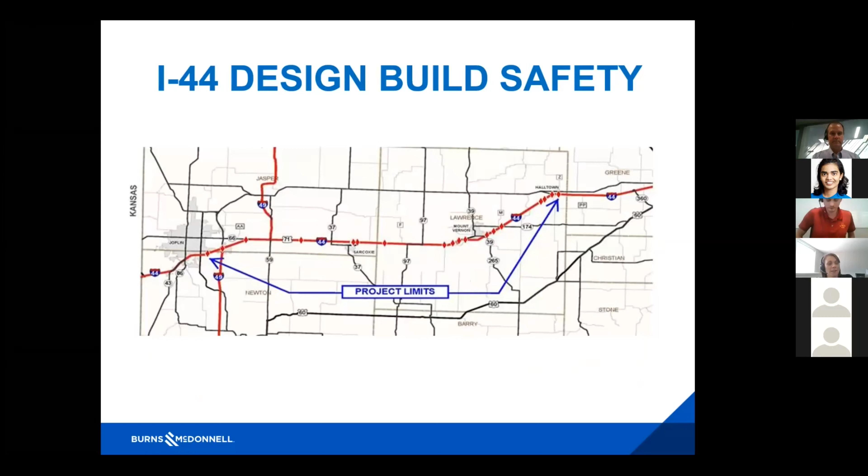So this quick recap basically has us help them prepare and identify selection criteria for the overall project. The original project was slated to be a rehab of 12 bridges spanning over 52 miles.

So partway through getting all the documents ready for this project, MoDOT asked us to go through and evaluate the data and figure out what they could add into this project to enhance the safety along the corridor.

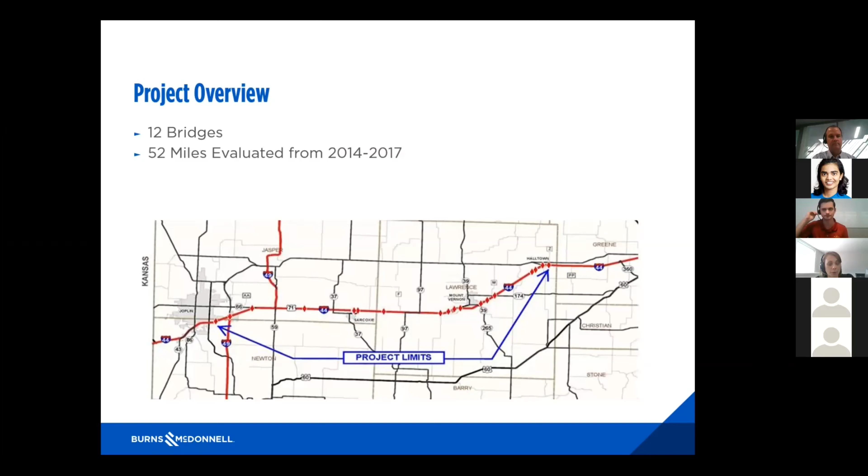We did this using a couple tools. ISATe, the interchange safety analysis tool that is widely available, and is pretty fun to use if you like data. It's data intensive, and so that was used at spot locations.

And then we used MoDOT's crash database, which houses all of the crashes within the state of Missouri. This allowed us to do some large overarching analysis.

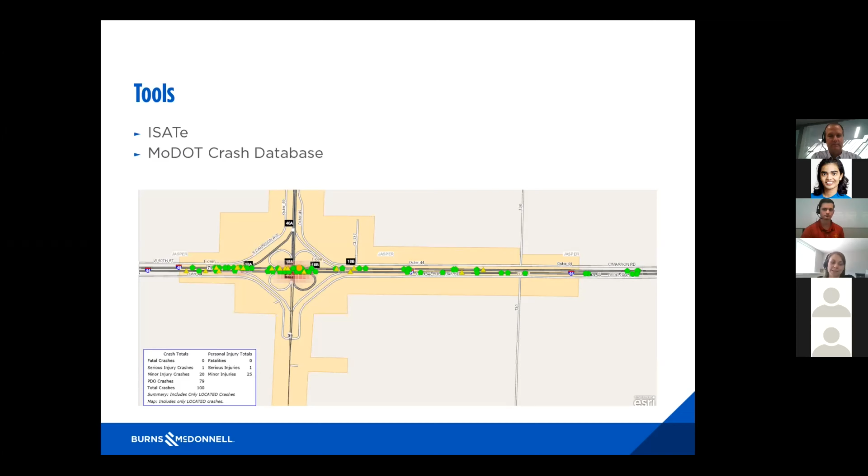Before I begin, for anyone who's not familiar with crash terminology, KABCO is the severity rating scale for crashes. K is fatals, A is severe injuries, B is minor injury, C is potential injury, and O is property damage only. We look at different combinations of these when we're doing analysis.

For the first pass of analysis, we just analyzed eastbound and westbound I-44. We looked at all severities, and we were just looking at a very basic number of crashes per mile.

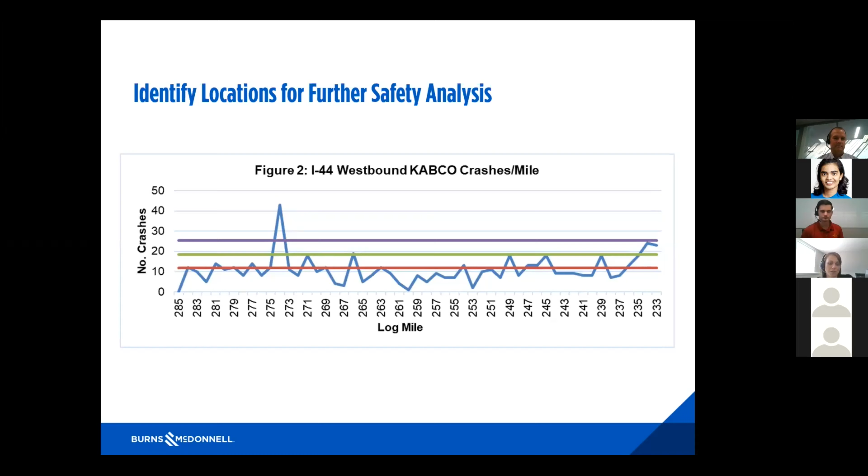So this was the same analysis, but we took out the PDO crashes to see if there was any areas where we were seeing a large number of injury and above crashes.

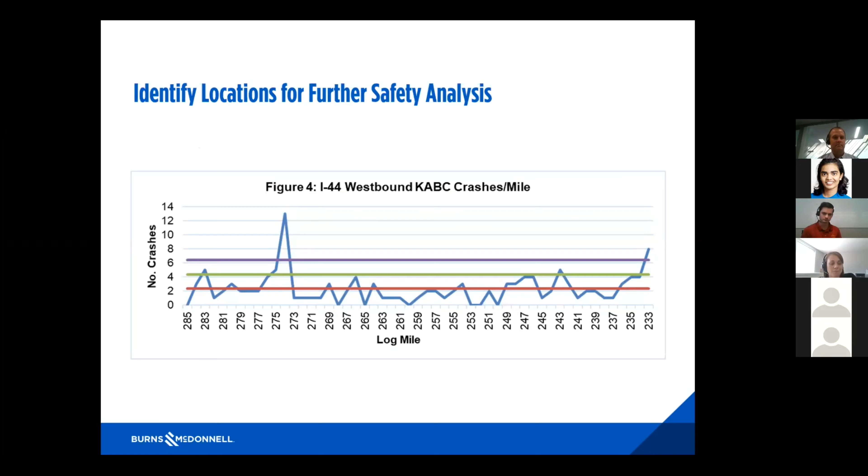Oh my God. Let's see. Okay. Sorry, I'm having controls issues.

So the third pass of our analysis included looking at all severity crash rate per mile, the crash rates, and then the crash rates for just the injury and above.

For this corridor, we were finding that we were seeing about 10.5 per 100 million vehicle miles traveled. We compared this to the statewide average, which is 23.4. So we weren't seeing as high of crash rates on this facility as other areas in the state.

So for the corridor average, backing up, so we had the 10.5 per 100 million.

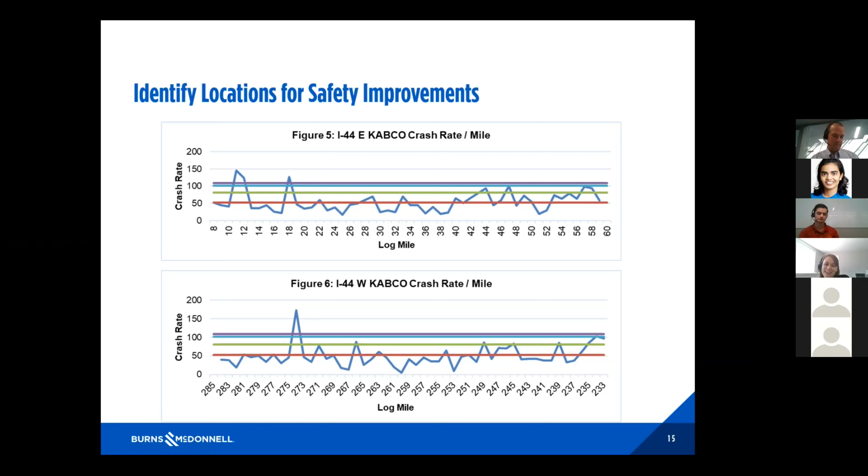We did have 3 miles within the project that were 2 or more standard deviations greater than that average, and so that was kind of an important point to look at.

We identified key points within the corridor that had a statistically significant number of crashes that we wanted to look at in more depth. So you can see those locations.

The first was the I-44, I-49 interchange. This location was found to have a crash rate above the corridor average, and most of these crashes occurred in the loop ramp weave areas, as well as the acceleration and deceleration lanes. Because mitigation measures would not be practical at this location due to the project scope, the location was not recommended to be included for the design build teams to look at.

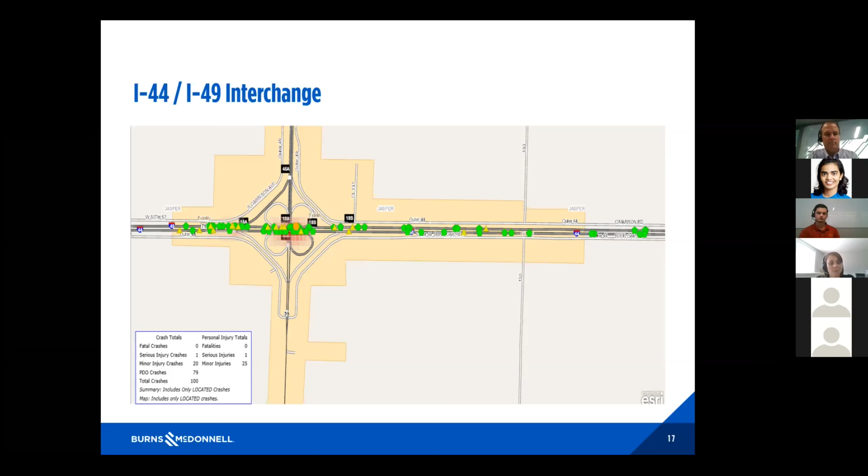Then we have the interchange near Prigmore. This interchange was actually recently built when we were looking at the data, so we did not have enough after data to evaluate whether this would be a good location to identify what we should be looking at from a safety perspective, and so it was also not included as something the design builders should look to include.

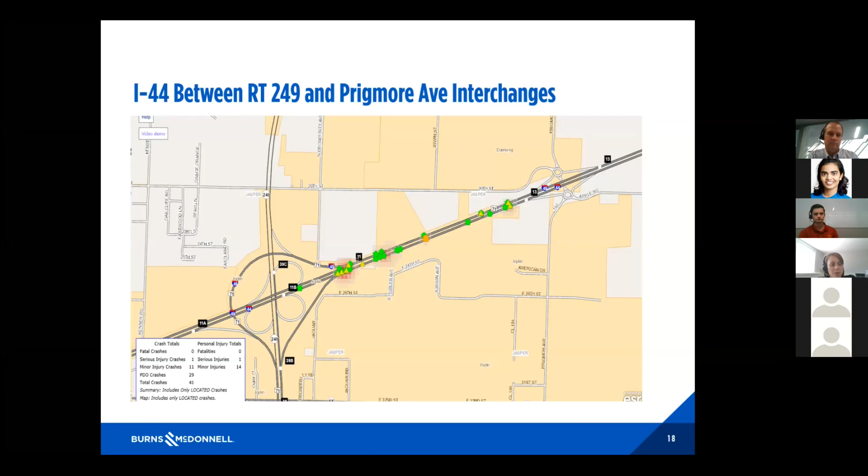The Route O, Z, and 96 interchange was actually identified at the very beginning of the project as an area of interest.

There are a total of 69 crashes within this segment, and 38 of those were identified as out-of-control crashes. MoDOT had the idea that this would be a good area to focus on to see if there were any improvements we could make with this project.

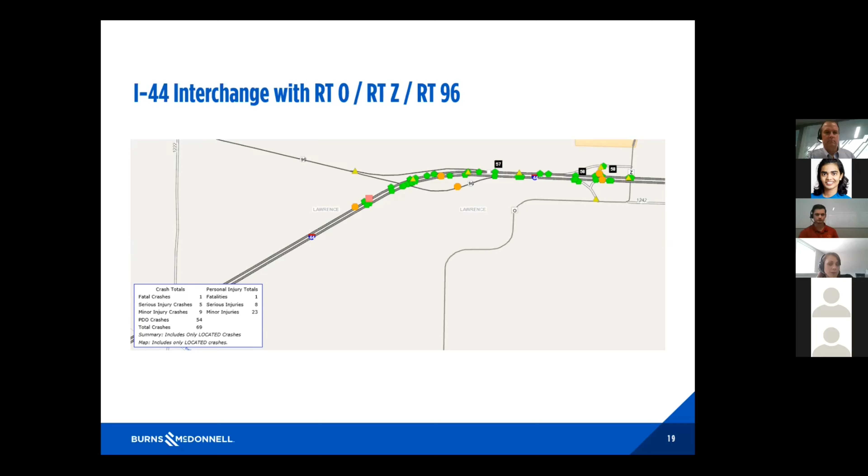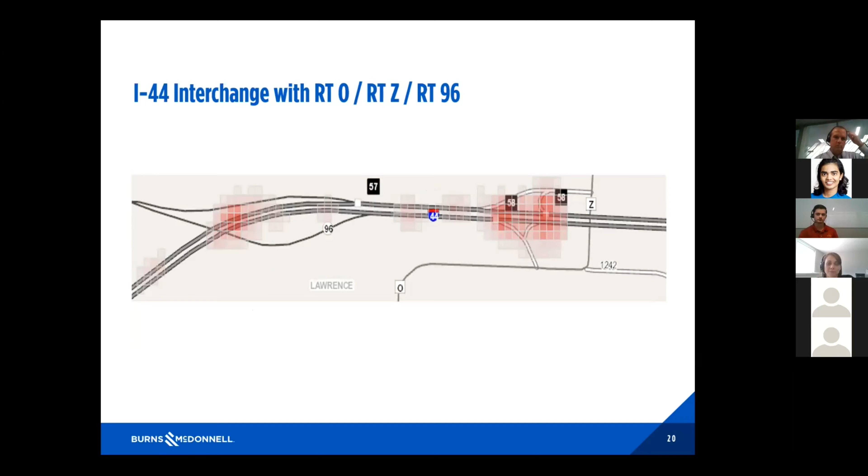This shows how their database works. It'll put densities for the crashes. You can see this is looking at just the out-of-control crashes we saw and where those were occurring: entrance and exit of curves, and at the different ramp terminals.

These tables show the predicted crashes versus what we were seeing with the existing crashes. From these tables, we can see there's a higher than predicted number of crashes occurring along I-44. The key areas were near the horizontal curves and the eastbound on-ramps, which you saw before with the heat map.

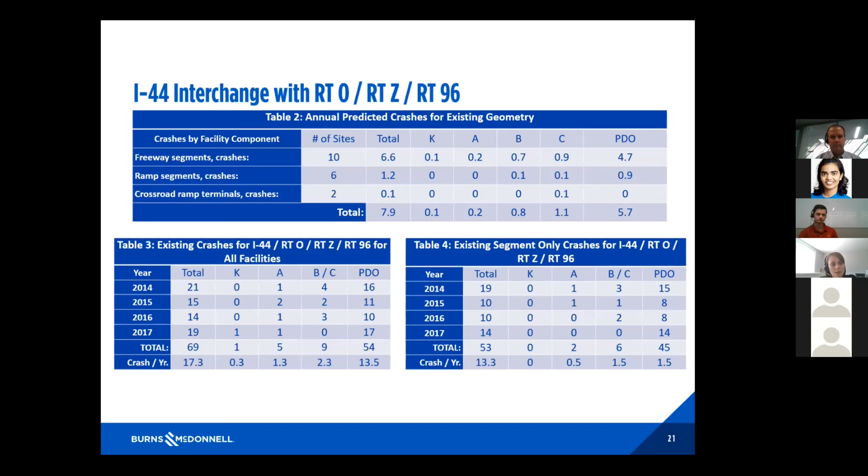In addition to this base condition where we looked at what was out there today, we evaluated an alternative where we eliminated two weave areas and changed the grade separation of I-44 and Missouri 96, which allowed us to reconfigure the ramp locations. The results are shown here — this basically results in a reduction of 9 crashes in 10 years.

That doesn't seem like much to you and me, but when you're looking at saving lives, reducing the number of crashes, any reduction is very important to look at. So 9 crashes in 10 years, not even a crash per year, really doesn't seem like much, but it will add up over time.

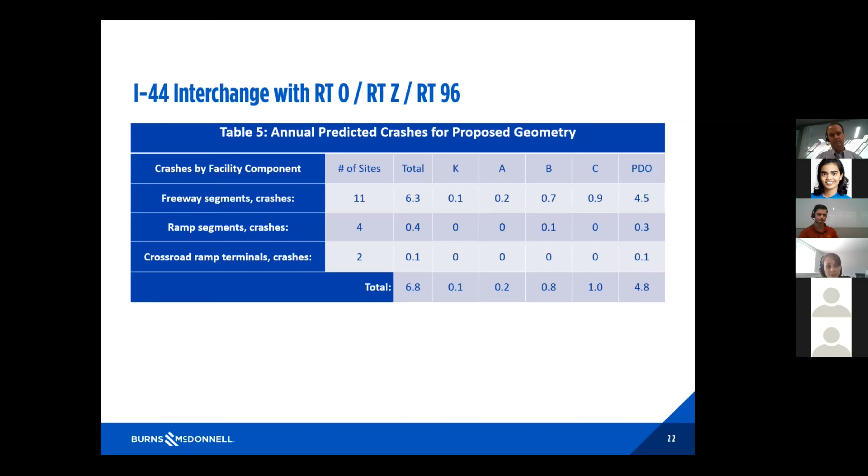So we have these quantitative benefits, and we also believe that the elimination of the westbound off-ramp, which was a loop ramp with an advisory speed of 20 miles per hour, would help eliminate the speed differential and reduce the number of rear ends — an effect not fully reflected in this analysis.

The fourth area of interest we were looking into was at Mount Vernon. This area was also included for further analysis, as well as an area of interest for the design builders to incorporate. The primary crashes here were due to speed differential. There's a very high number of heavy trucks in this area, and many of the crashes involved those heavy trucks and the short acceleration and deceleration lanes.

When we ran the models, we were seeing about a reduction of 1 crash every 10 years. But when we looked at it from a different perspective, using CMFs, we saw that there would be about a 22% reduction in crashes in the area.

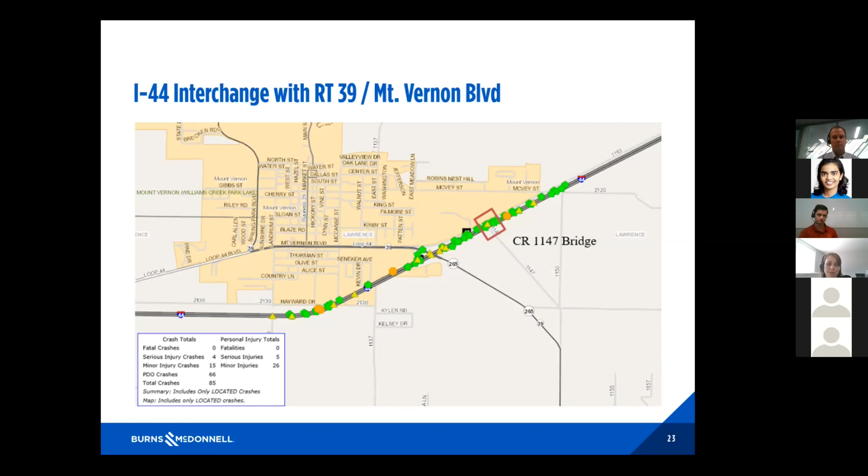At those locations, we looked at what the existing crashes were, and we saw that wherever there were smaller shoulders, there was an increase in traffic and in crashes.

So we were able to use that to say, hey, if we tell the design builders to add some widening, that should increase the safety at these areas.

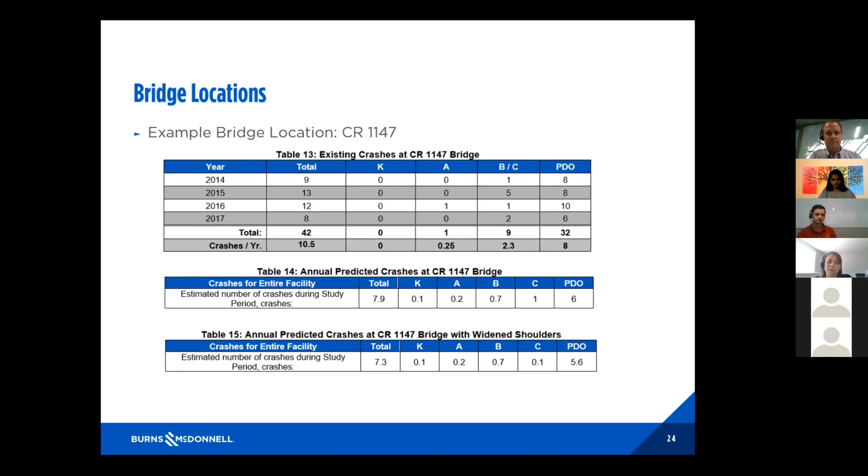So the inclusion in the bid — we ended up putting together these different rankings to be able to be included in the bid.

However, the only things included in the winning bid, and all the other subsequent bidders, were signing and pavement markings. These are fairly low-hanging fruit that the DOT tends to do themselves, but this allowed us some lessons learned — basically that we needed to award either more points or more money for those safety aspects to be included, as well as starting out the project knowing we want to include safety.

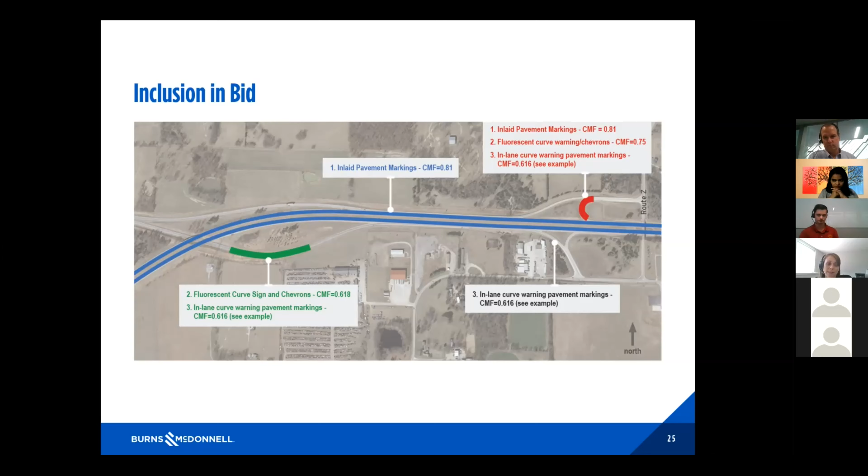So here, let me see if I can get my laser pointer up.

So for this presentation, we're going to be talking about one of the bigger projects that we have going on at Burns McDonnell. I'm sure many of you have heard about LaGuardia Airport in Queens, New York.

So with this, it is an $8 billion project. Our portion is $4 billion.

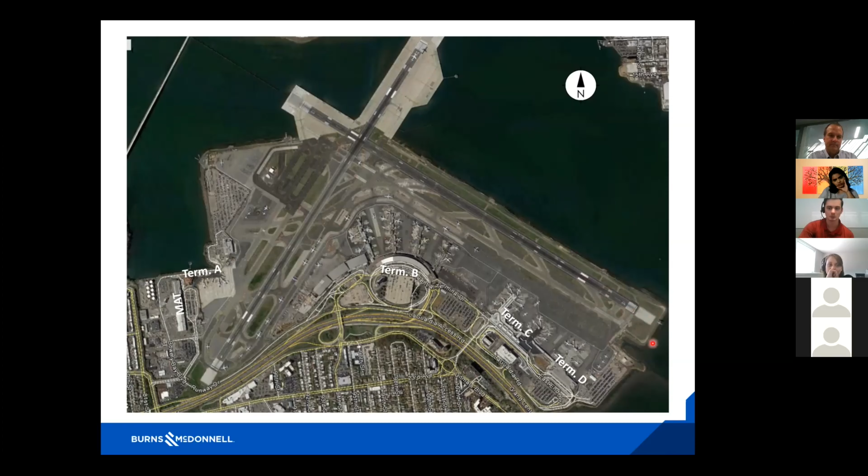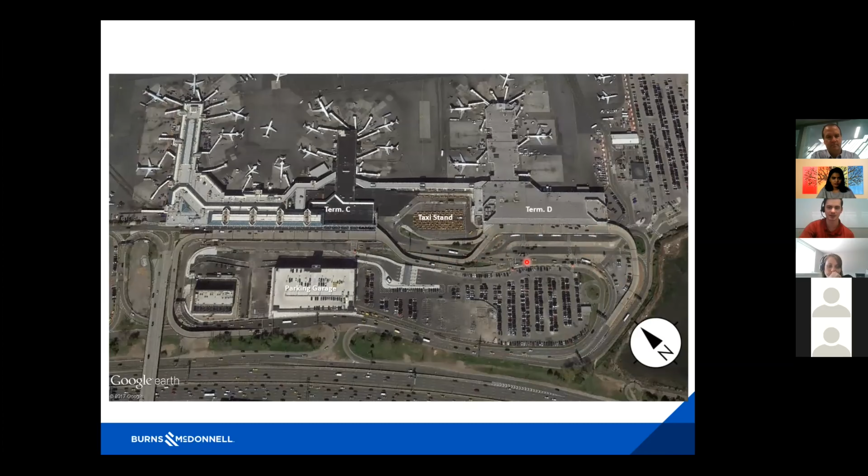Here's a blow-up just to give you an idea. There are two levels in the existing design, departures at the top and arrivals at the bottom. As you can see, you're going up and down quite often instead of just staying on the departures level like in the new design.

One thing I didn't mention is that Burns and McDonnell has a different practice that does the aviation side — from the curb, to the terminals, to the airplanes, to the actual fueling and runways — and they are working on that portion of the new design. Our transportation group is working from the curb out. So it's curb side, land side, and air side. What we are doing is more the roadways, the cars getting there, people getting to the airport, and then our aviation group takes care of things as soon as people enter the actual airport for the new design.

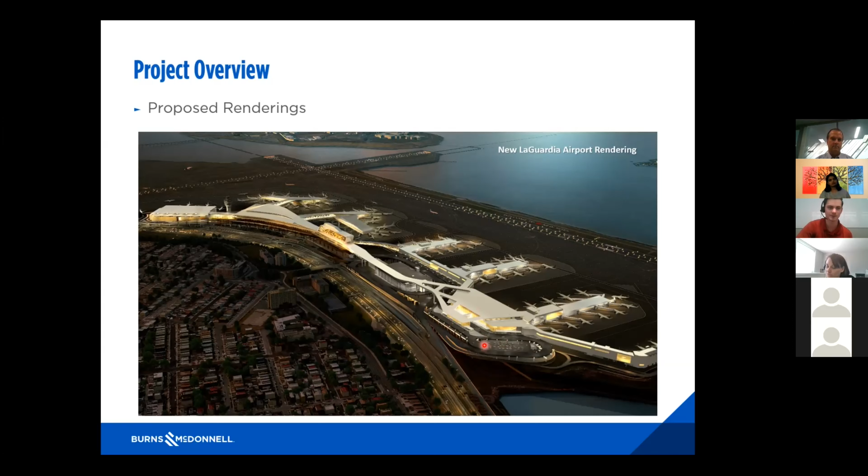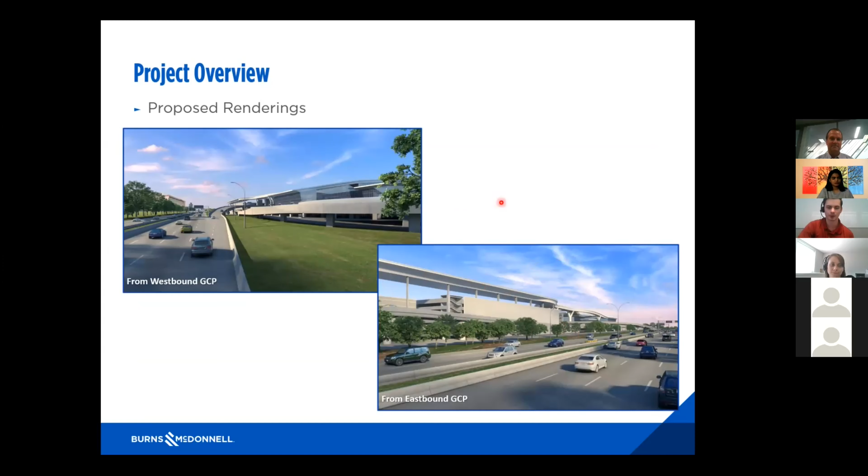Here are some new renderings for different roadways that our architecture group came up with to give Delta an idea of what to visualize, along with some interior views of what the new airport's gates are going to look like. As you can see, they're sparing no expense for this new airport.

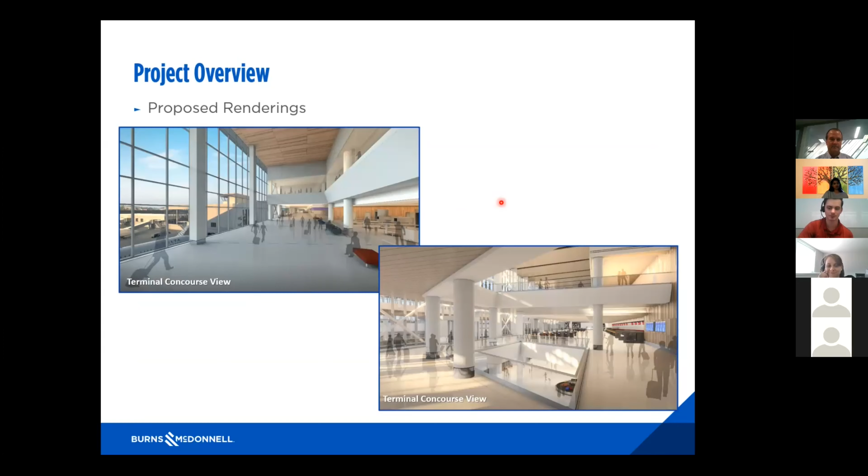When it comes to airport traffic and roadway design, there are four main things you need to utilize — two standards and two software packages predominantly. The ACRP Report 40 gives you the entire lowdown of airport design: the different roadways, different speeds needed, the different modes of transportation that utilize airports, and how to use occupancy factors to translate planes full of people into passengers and cars getting to and leaving the airport.

Then there's the classic Highway Capacity Manual, just for capacity of roadways. The main software we use is PTV VISSIM, the Cadillac of microsimulation. We can input all this data and it gives us results — we can analyze different construction stages, final build conditions, levels of service, delay, parking, pretty much anything we need for different construction stages and final design ideas. We can vet through VISSIM before testing it out on the public.

And then Synchro 10 is the software we use to analyze the different signals we might have to use during construction and the final design, just to get different levels of service and evaluate pedestrians crossing these different signals.

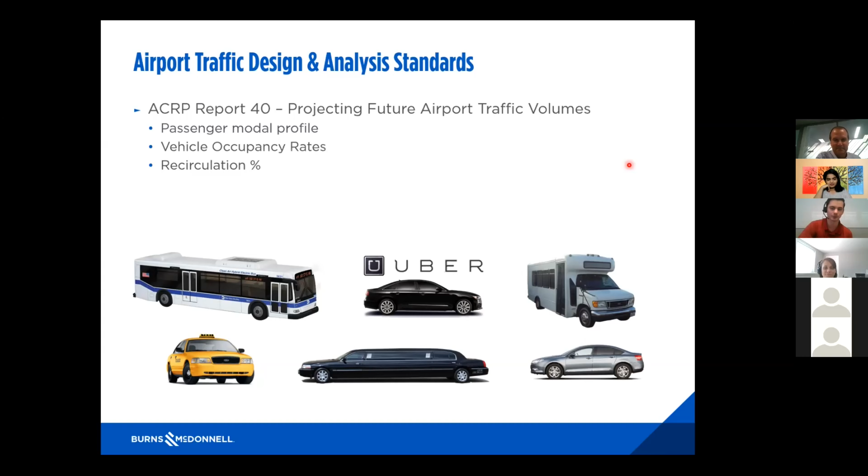So typically you would think, oh, just get traffic counts at the curb and that's how you figure out your traffic. Yes and no. For airports, for planning for the future, when this thing is actually going to be built in 2026, we have to look at what the flight data looks like.

How many planes are taking off? How full are these planes? What time are they going off? We have to look at that kind of data.

The same can be said once passengers leave the airplane. Some people are booking it at 10 minutes, as soon as it lands, they're at the curb. Otherwise, most people take about an hour to get their bags, walk through the terminal to get to the curb, and actually use the mode of transportation they're going to be utilizing.

And all of that is layered across several gates, so it takes a lot of analysis to try to get a final number for what's at the curb for a certain peak hour.

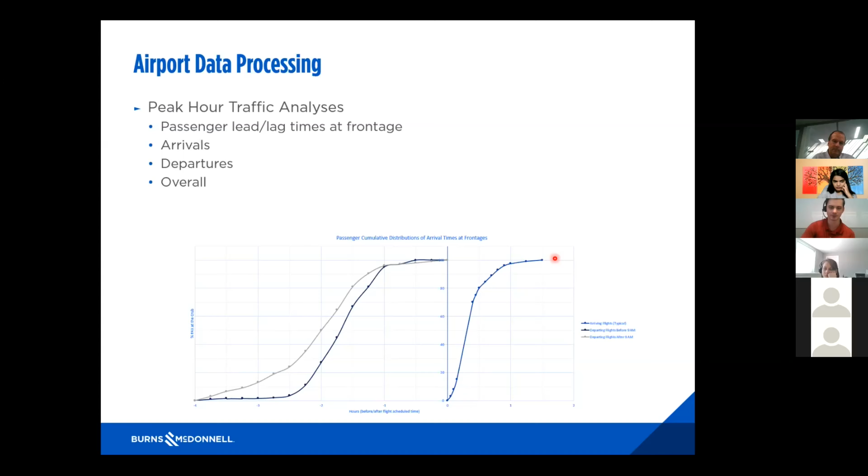And why we do all of this is we want to evaluate the level of service and what you can expect going to the airport. For the Port Authority of New York and New Jersey, which is the agency we evaluate to and whose standards we need to keep to for this airport, they allow for a level of service C or D.

As soon as you start getting to level of service E, that's no good. You don't want cars backed up to the interstate and having pilots walk across the tarmac to try to get to their plane. Predominantly for the new design, we're looking at level of service B and A. So Delta wanted to make sure the performance of the airport kept passengers content and happy getting to the road, not already upset with traffic—that was their entire goal. So they upped the capacity, they spent more to allow that for their customers.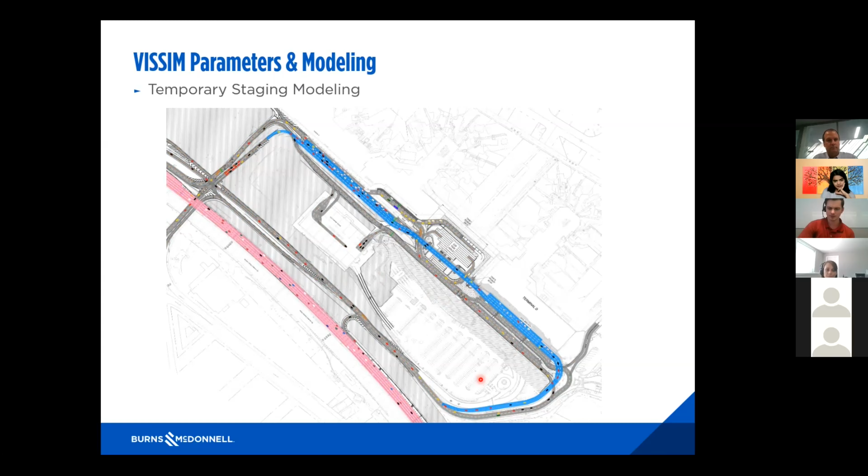So here's the zoomed in area. You can put in traffic timings, signal timings right here - black, and then it goes to red to a green cycle. With this, we can evaluate different construction phasing. Sometimes it's not the roadway geometry - a simple signal change can help make the traffic move more smoothly, and we don't have to try to find more room for roadways or anything like that.

So this software allows us to save money and time for construction as it's going on, which is why we do this and why Delta is willing to pay for this modeling experience.

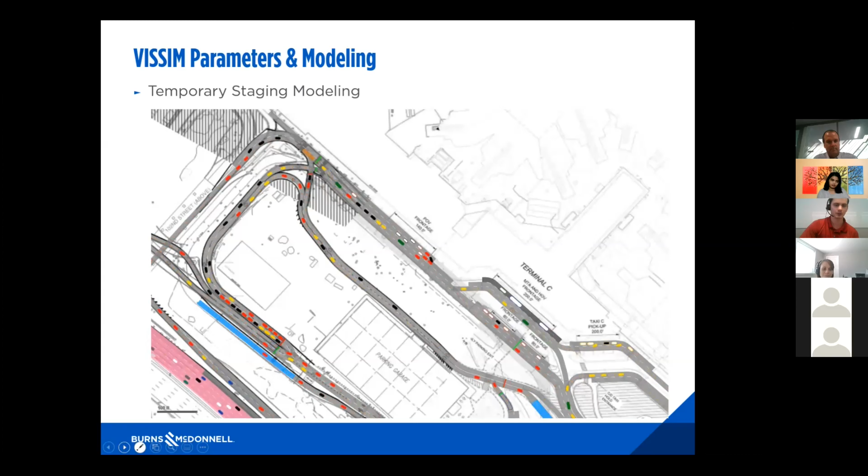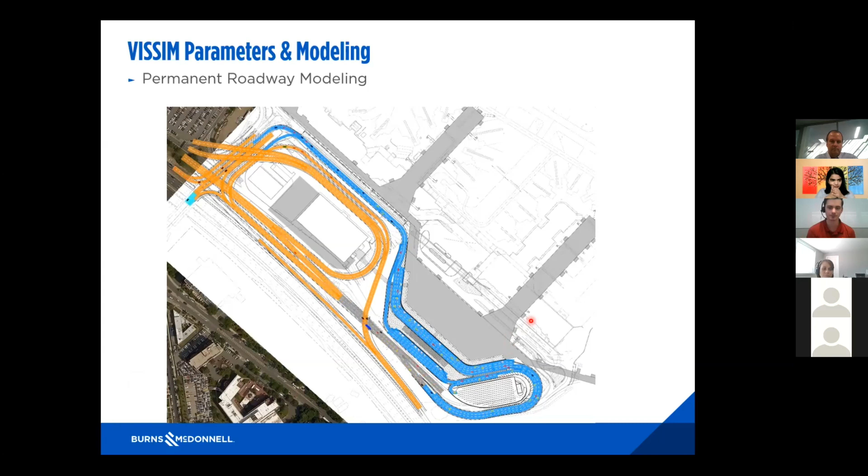And with this, the client really enjoys seeing the power of this software, because we can go into 3D and it gives a more real feel of what this is going to look like. So this is great for presentations, and it helps with the higher ups at Delta and our different clients to get a bigger idea of, okay, we're going to be building this in the next 5 years - I want to know what this is going to look like, how is it going to perform. From the 3D effects, you can really show what they're building, what they're spending all this money on, and it helps show what all the software can do and what they want to show their shareholders as well.

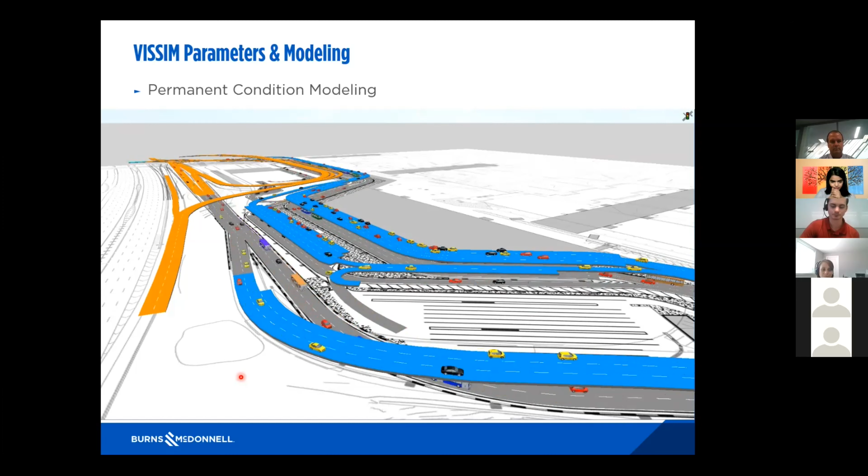And then this gives a secondary angle, and you can kind of see the yellow or the orange roadways are above the blue, and then you have the arrivals down below those. So it gives you a different angle, because from the bird's eye view, you can't really see the elevation differences.

I'll let this video run out so you guys can see how it all works. And right in here is a garage with vehicles exiting through a toll gate to pay their parking ticket for however long they were there.